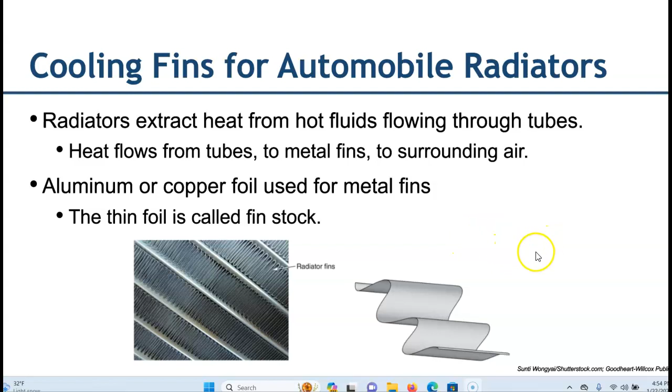Pretty common. Sometimes engineers refer to this as a heat sink, where we sink actual heat into other parts and then blow air so that it helps as a cooling application. So we had to manufacture these radiators that are doing this and use the radiator fins. Now, that particular manufacturer realized that there's a similarity between the cooling fins on the automobiles and cooling fins that are used for blood coolers and dialysis machines.

So of course they were able to capitalize on that just by understanding the nature of that material, already have the machinery and equipment in place to process that, and then they basically were able to take advantage and have a new business opportunity where they could go and not just produce automobile radiators, but also produce this fin stock for the blood coolers that were making those for patients as well.

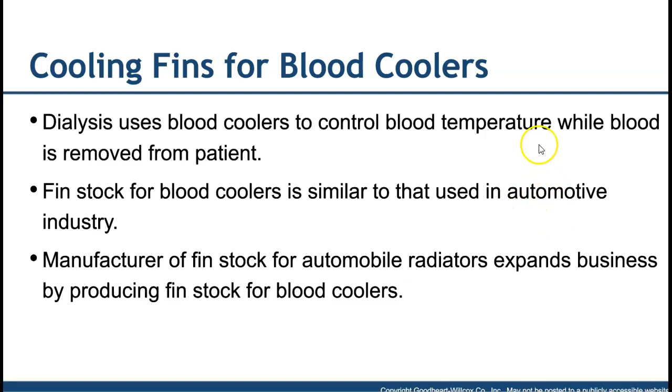Now, there are different specifications for those as well. So there's a problem the textbook kind of goes into. There's an order rushed out where they didn't check all the specifications, and of course there's a rejection there. There's gouges and tears in it, which is usually pretty easy to do in thin stock materials. So the technician who made the order apparently wasn't aware of different specifications.

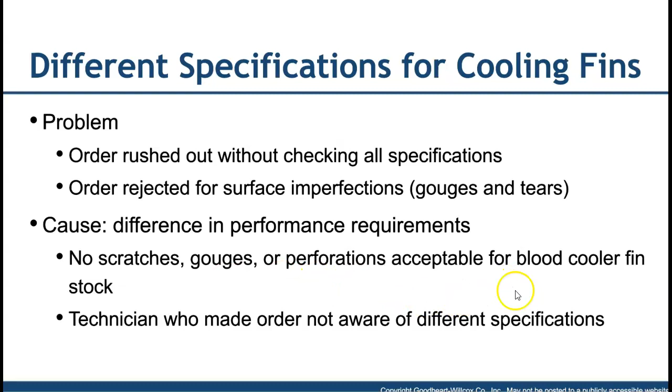So this is where the individual and somebody on the shop floor definitely has a responsibility to make sure that you know what design requirements are and are paying attention to differences in this type of material that's being used, and paying attention to any scratches or gouges or anything else that might come into play that cause us a defect in the quality of the work that we're putting out.

So it also talks here in the chapter, of course, all of us in Illinois who've been up around Chicago have been to Chicago's Cloud Gate, although many of us probably don't know what that material actually was. And in the design concept behind it, they were going into several different materials. Of course, the textbook goes into how they couldn't use ordinary steel because it rusts. Chrome-plated steel requires some different things and doesn't maintain shine at the weld points. Aluminum, of course, requires frequent repolishing.

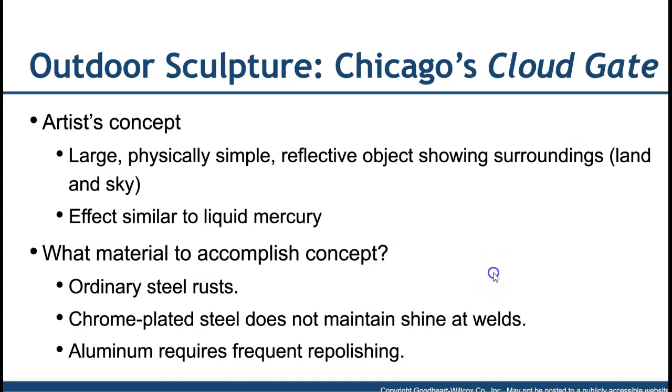So the metallurgical solution here, and this is of course from an artist or sculptor's standpoint, was using weldable stainless steel and a filler metal that matched in color, then was able to use the arc and laser welding processes to basically give good welds, polish, and ground where it leaves no marks on the surfaces. And there we have the immortalized Chicago bean, otherwise known as Chicago's Cloud Gate, as one of the sculptures that is basically metal being used in stainless steel up in Chicago. So those are some of the areas here where we talk about application of this.

Now, in my own work experience too, especially in the canning industry, the company that I worked for made a lot of bottle caps, and of course they had the steel leftover sheet after they were pressing and punching those caps. Well, they were of course always looking to reduce and recycle. They were left over with that, and they thought, well, what could we use it for?

Well, one of the engineers had the foresight to realize that the shape in the sheet metal after the bottle caps are punched out was similar to what the furnace filter manufacturers were using. So additional business opportunity. The company I worked for, their waste material, that scrap that was usually thrown away, actually became a sellable product that they could sell to the furnace filter manufacturers that had that need.

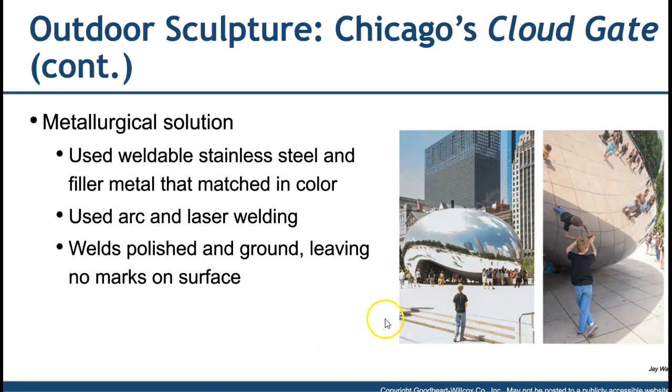So, kind of paying attention to some of these different material requirements, metallurgy and the shapes that are generated also helps to build additional business possibilities and solutions to increase sales and do better. So that gives you an idea there.

So as we conclude this, we know that metals are everywhere. It's kind of hard pressed to look at any type of product that either hasn't come in touch with metal or is metal that we're using in some way. So if you think about that, just a general knowledge of metallurgy can really, really benefit those of us in industrial technology and in manufacturing. So there's a great need for this information.

And of course, as things advance, as materials get more and more complicated, as we learn how to reduce, reuse, and recycle, we have to think about how we can repurpose some of this material. We also need to think about, as we use up the existing materials, how we can change materials to still maintain strength and continue to make the products that we like to have that make our lives simpler and easier.

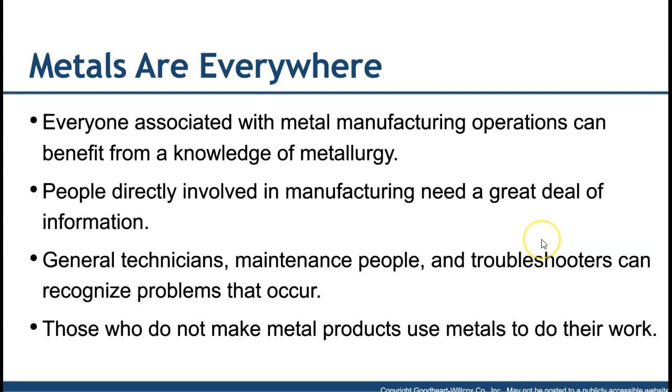So there is no shortage of demand for people with knowledge of industrial materials, and basically problem solvers to think out of the box. So that's kind of the emphasis that we're going to discuss in this class, is trying to think of all these different ways here and the applications that are going to be used, so that you can think critically when you're out there in the job working and using the machinery, cutting the metal, welding the metal, doing whatever you need to do to make good products out of the metal as well.

So if we're talking about advanced metallurgy, again, like I said, new innovations and breakthroughs are happening all the time. I think nowadays it's probably a little bit more involved in composites and nanomaterials, but certainly traditional metal work is still there, and there's still a big need for that. So just as an example given is oil spreading onto a metal sheet, how that oil can reduce rejected parts, and you may be able to increase your speed when you're in the stamping or forming process. That may result in reduction of production costs.

Now, on the other hand, going back to my own experience, I did work at one point on an assembly line type application where they were trying to increase production. It was more or less an automated line that was feeding cans along an assembly line type track through these rollers and conveyors, and it would have to turn at 90 degrees. So these cans would all come into a mandrel arm and then be spun around 90 degrees to go into different locations. So think of it like a sprocket: one conveyor line feeding a lot of cans into a centralized spoke, and then that spoke would distribute the cans in different directions.

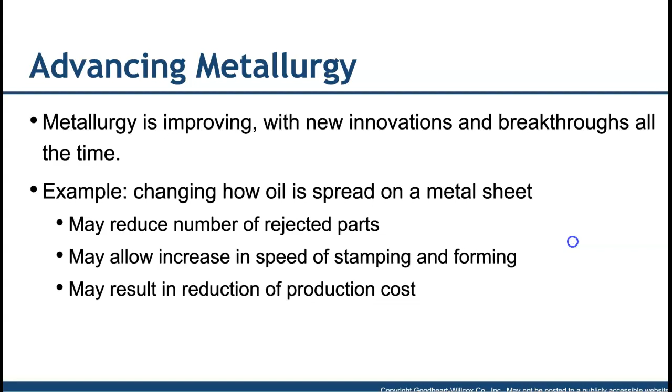So that's two experiences in my past where having a general knowledge of metallurgy has played a role, one that helped to make an improvement, and another where it didn't quite have the same impact. And that was a long time ago too. So I'm sure that by now, 20 years later, they definitely are moving that equipment a lot faster than they were 20 years ago.

So as we go through, remember, the main thing behind this is we take all sorts of different elements and different metal combinations. We put them through a variety of different processes, between the composition and the processes that are put on those, whether the processes to actually make the sheet steel or the bar stock or the plate, then the heat treating processes and the annealing processes. That all changes the microstructure of the material on a microscopic level, changing those chemical bonds between the alloys. And of course, that gives us different properties that are desirable for whatever we are using that material for.

So that's the main takeaway here as we go through and really start to dig deeper into all of the industrial materials that we're going to be looking at over the course of the next 13 weeks in this class.